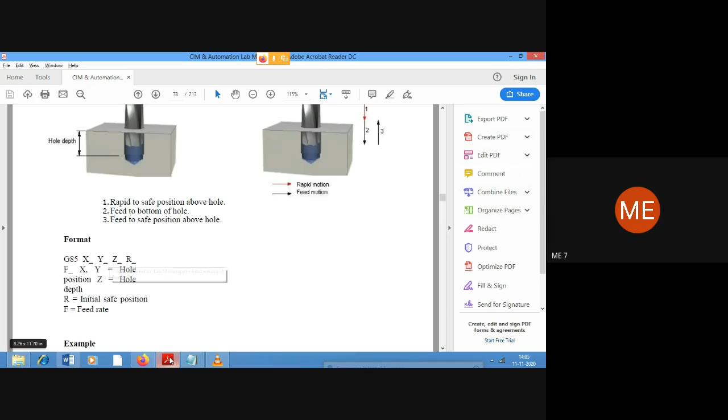Problem number 4. Write the manual part program for the part shown below using SeeNC Mill. Select the tool. For 5 holes to be drilled.

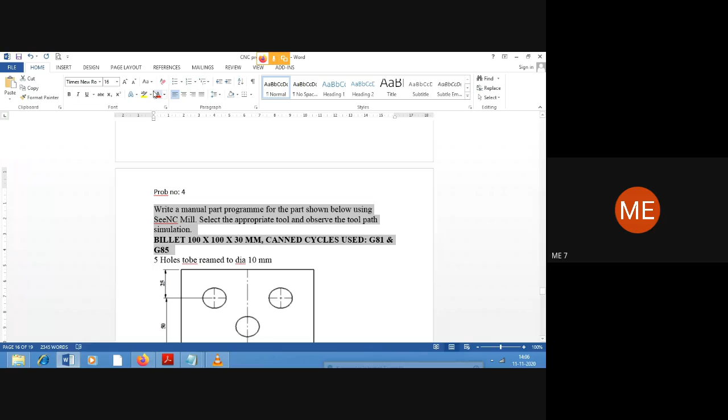So only write the manual part program for the part shown below using SeeNC Mill, right? Or will they only say write the manual part program for the part shown below? Okay, and these details will be given.

What, 5 holes to be drilled, to be reamed to diameter 10 mm. It has to be drilled, and if you remember the types of drilling operations, we have varieties in that. One of them is the counter bore, the other one is reaming. So here they are telling us that after drilling, it has to be reamed also, that is to provide smooth surfaces in the places where the hole is being drilled. So reaming has to be performed.

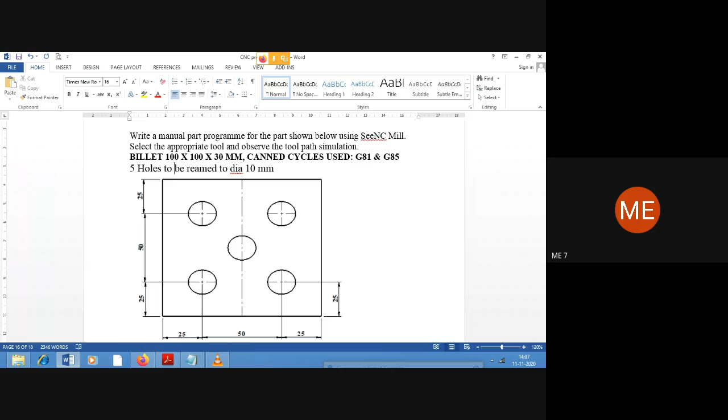Yeah, right. Now for this, we'll see what to do. So 5 holes have to be made. So first let us write the coordinates. The first thing is that anyway face milling has to be done. So the coordinate for the first hole over here is 25 comma 25.

Second hole, we can go for, just a second, right, so yes, they're going in here. So the second hole will be here. We'll take this x25 y75. Then the third one will be at a distance of 75 comma 75 over here. The fourth one will be at x75, y25, right?

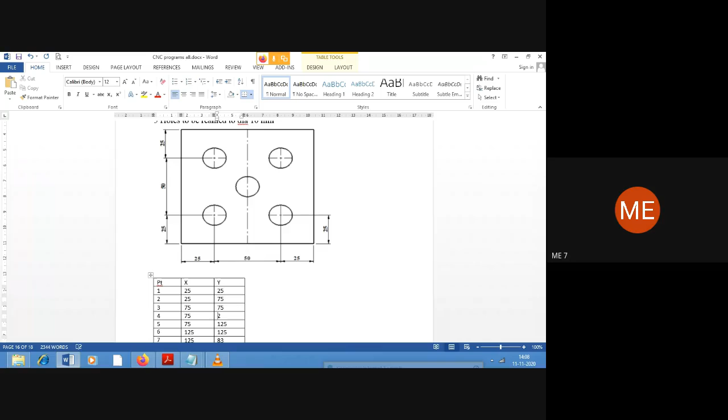Okay, so the remaining is not required, is not there. And there, we can assume the thickness of the plate if they are not given.

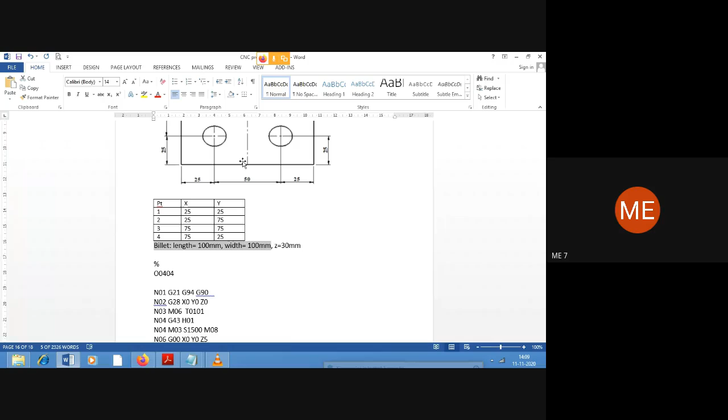Right. So now, after this, billet size, the overall size of the plate itself is 100 by 100. Okay, right, okay.

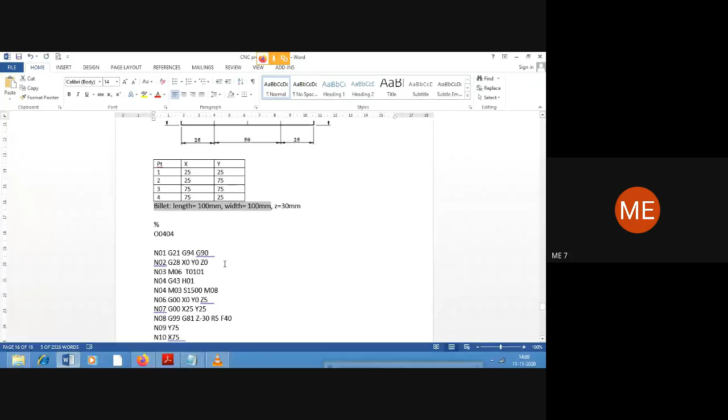Okay, so we'll start writing the program. Yeah, so for this, okay. In, second. Yeah.

Okay, so first start with the percentage symbol, then program number, first percentage, next line capital O, then followed by 4 digits, right? Then N01, G21, G94, G90. So, right, absolute coordinate system, G21 in SI units, right?

And so on, next line please, here it is as N01, 2, 3, 4 and so on. Please, when you write it, write it as N01. Next line should be N05, third line N10, sorry, N10, N15 and so on. Okay, right. So N02, okay, G28, X0, Y0, okay, and Z0.

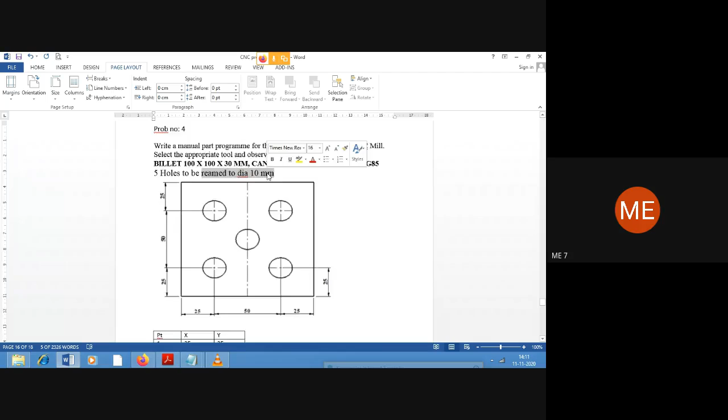Okay, right. So, but please, when you execute the program, or also when you write it in the record, first write the lines for face milling. Then the second tool will be for drilling, and the third tool in this case will be for reaming. Okay.

Right, so yes. Now after the spindle is started, we'll get it to do the drilling operation. So we'll get the tool to G00 X0... instead of this, we can directly get it over here at x25, y25, and z5. Yeah.

Right? All right, so now, see, in this case, in the previous class, if you remember, we did only drilling, which was for only 2 holes. But here you have 5. In some cases there'll be even 100 holes that has to be drilled. So every time we cannot ask the tool to, to say, for example, just a second.

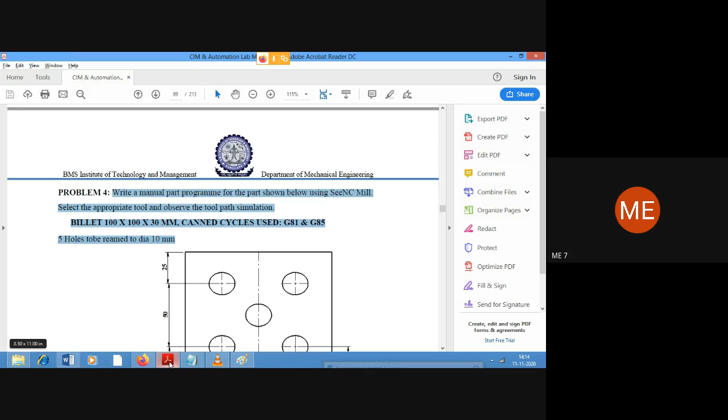We'll see the canned cycles for the drilling and reaming operations, for the drilling operation.

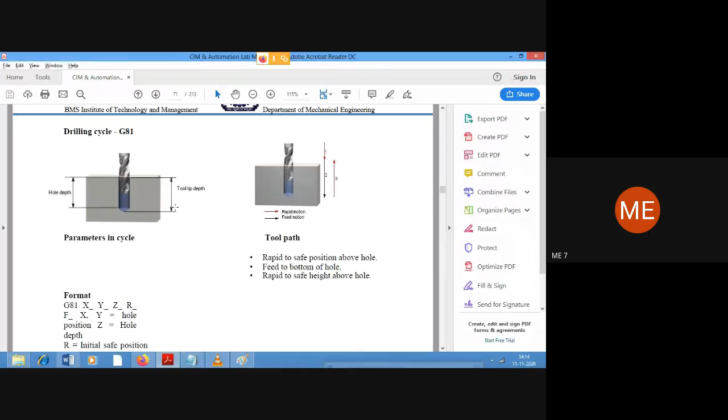Now for a smaller depth of cut and all those things, we can directly use the drilling cycle, which is denoted by G81. So if you remember the drilling operation, directly the drill bit tool will be going inside the workpiece, removing the material for a certain depth.

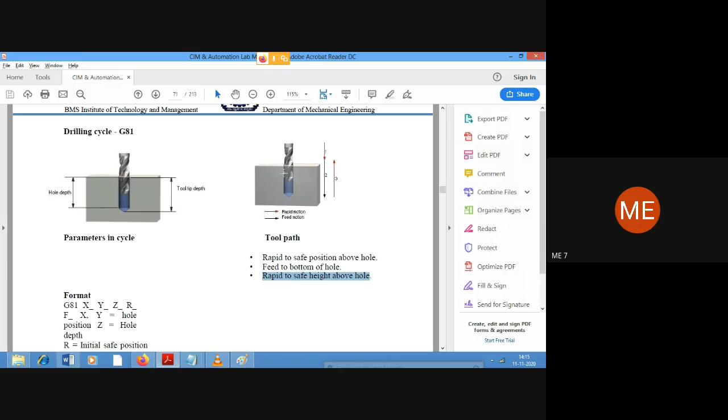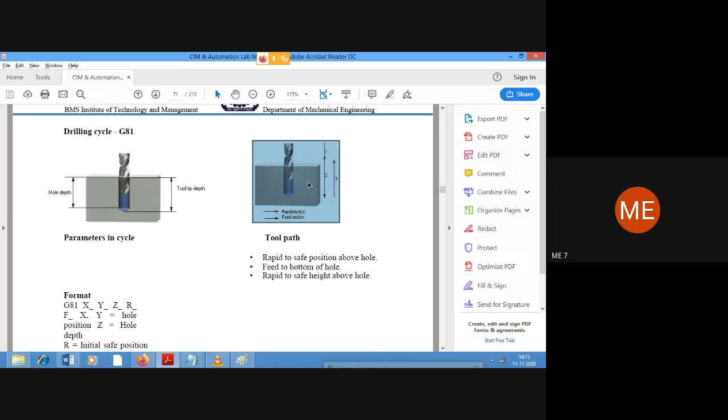All it needs is first, it should come to a safe position above the workpiece where it has to be drilled. Second, it should be fed to the bottom of the hole, that is, the drill bit has to move vertically downwards inside the workpiece. Then the drill bit has to come out to the rapid safe position above the workpiece surface, so that it can then move on to any other position, or go back to its home position. So G81 is the code for the drilling cycle.

We have to give the X value for that particular hole, Y value, Z value, and R value, say 5 mm above the workpiece surface, that is nothing but the Z value. Instead of giving Z5 every time, you give 5, or 10, or even 2 mm, though 2 mm is generally not preferred. That is the initial safe position.

And at what speed the drill bit has to be inserted into the workpiece, this is denoted by F. So this is the format and syntax for the G81 drilling cycle.

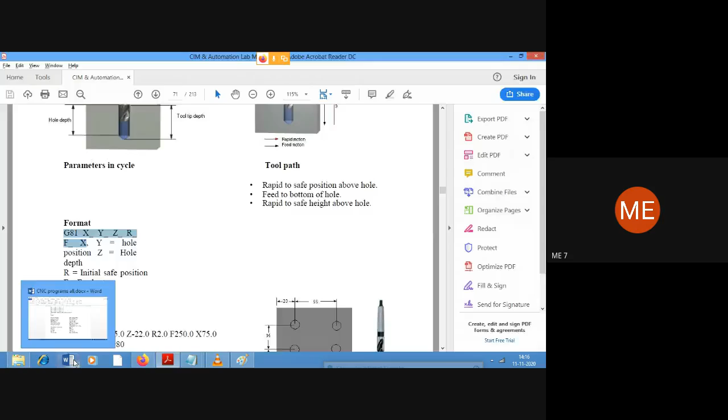So now we'll come back over here. G43 H01, spindle start. We have now brought the tool to X25, Y25, Z5, onto the first hole over here. Next is G99, that is, get the tool to the safe height.

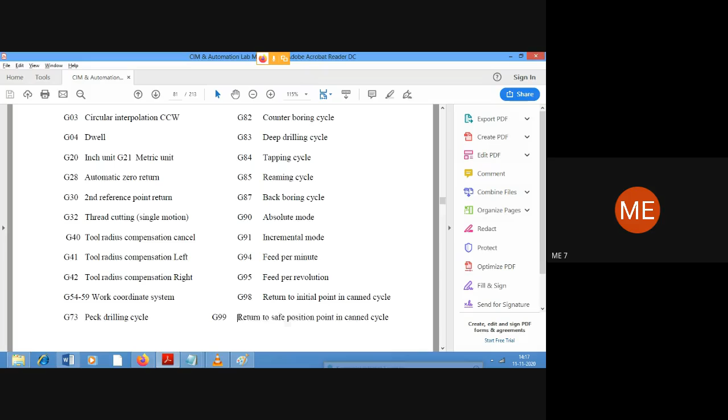Return to safe position point in canned cycle. Next, so now starts the G81 drilling cycle. We have already given the X value, Y value and Z value. We have to give only the Z value now.

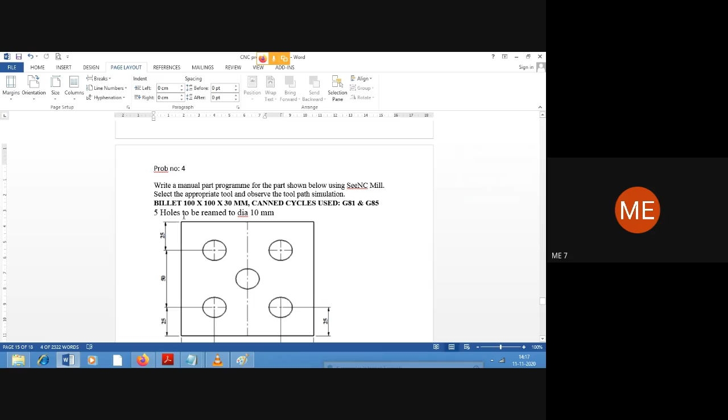So Z minus 30, because the question says it has to be drilled up to a certain depth, but they have not given the depth, so we can assume the depth, say up to 30 mm. And R5, that is return to safe position, return to 5 mm.

So if we have this as the X coordinate, Y direction, this the Z direction, we can ask the tool to come back to a Z point of 5. So the tool will be here, with a distance of 5 mm. And the tool should move at a speed of 40 mm per minute, sorry, not SI units, feed per minute.

So first hole is drilled. After that, it will come back to the value R, Z5. Then the tool has to move to its second hole. We only have to give the coordinate, no need to ask it to go inside so much depth, come back, and all those things. Just give the coordinates of the next hole, that's all.

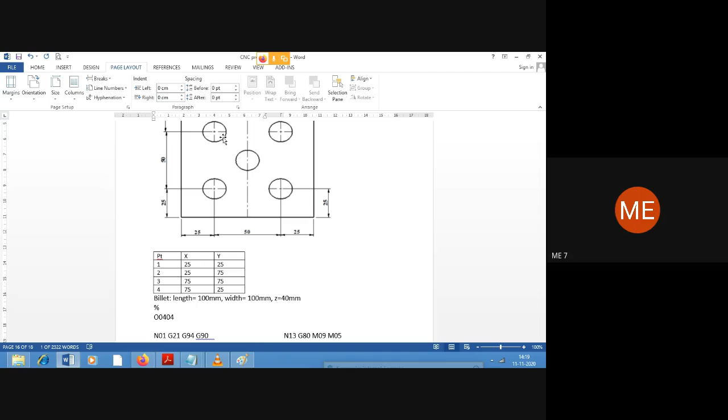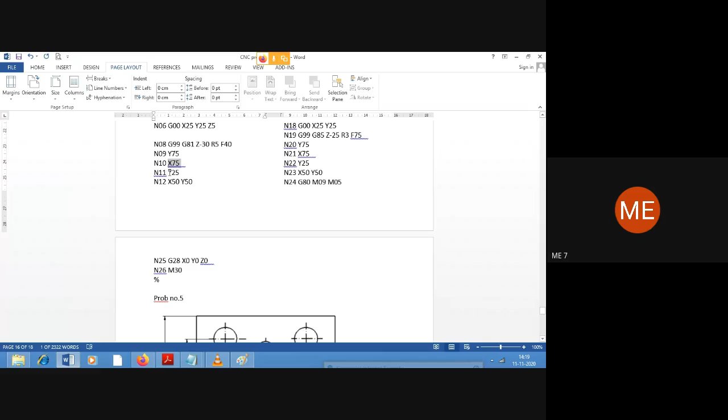So the next hole is at Y75, X25, since the X value is already 25, only Y is changing. Then in the next line, we'll ask the tool to go to the third position, X75, Y75. Then the fourth one, X75, Y25. And finally the fifth one, X50, Y50. Five holes are there, see?

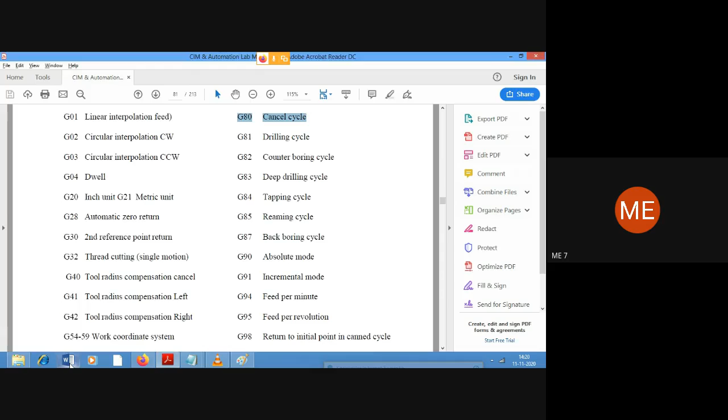Right, so after that, once it goes there: G80, M09, M05. G80 is the canned cycle cancel, so we are coming out of it. M05 is spindle stop, M09 is coolant off.

Then go back to home position, G28 X0 Y0 Z0. Then change the tool, M06, T0202. Next line G43 H02. Start the spindle M03 S750, coolant on.

So in tool number 2 here we are going to use a reaming tool, nothing but to give finishing operation for the drilled hole. Generally the speed will be less.

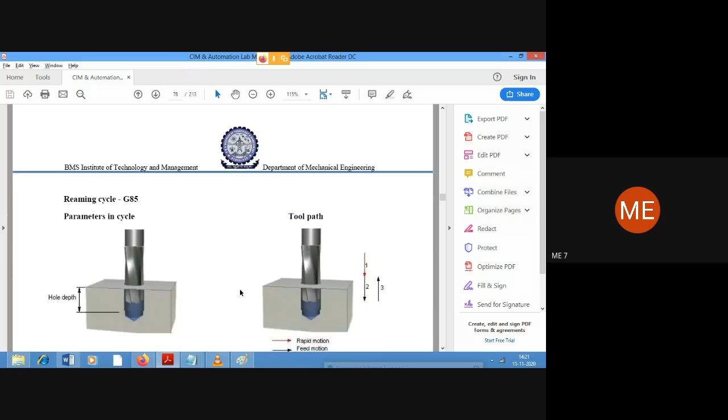Then get the tool to the position of the first hole, G00 X25 Z5. Then G99. G85 is the cycle for reaming. Reaming cycle, G85.

A reaming tool will look a little similar to a drill bit, but doesn't have so much depth of groove. Here's what happens: first the tool will be at a safer height, similar to the drilling cycle. Then the tool has to be inserted into the already drilled hole up to the bottom. Then the reaming tool has to return back to its safe position above the workpiece.

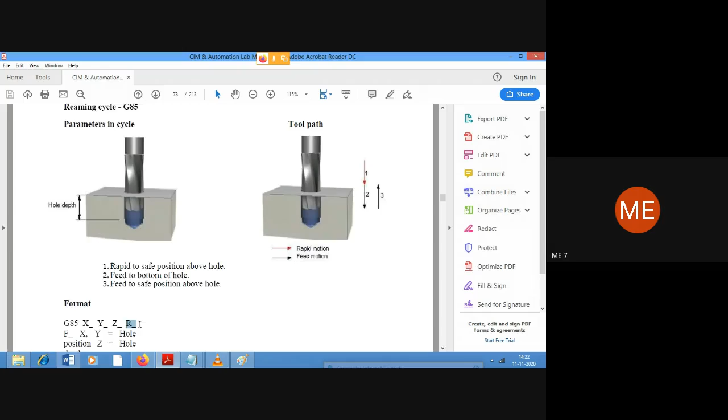So the syntax is G85, X value, Y value, Z value, and R value, along with F, the feed rate. So G85, Z minus 25.

Just a second, we'll put it over here. We have given 30 for drilling. Reaming also we can give up to 30. Then R3, or you can give return to safe position R5.

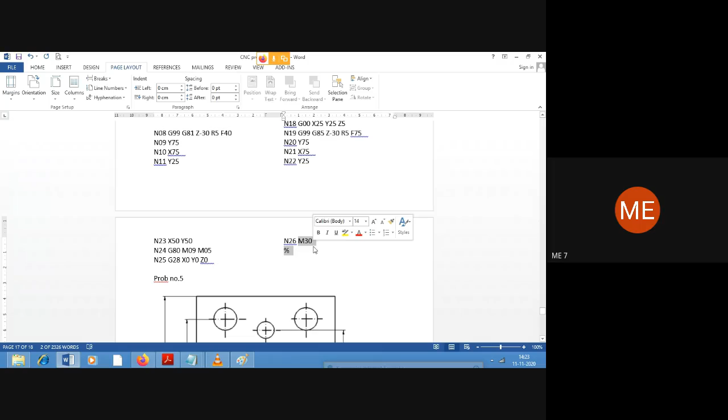Then F75. Similarly give the coordinates for the second, third, fourth and fifth one. So Y75, third one X75, fourth one Y25, fifth one X50 Y50. Then G80, cancel the cycle, spindle off, coolant off, G28, X Y Z zeros, end the program with M30 and then percentage symbol.

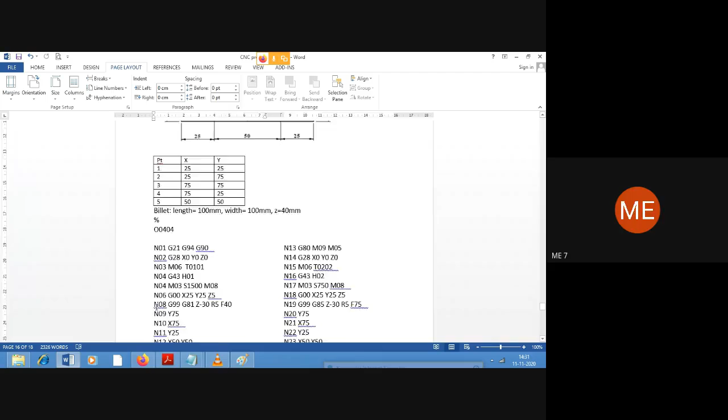Excuse me sir, over. Can you show the diagram sir? What, diagram sir? Diagram, yes sir.

Yes sir, it's over sir.

Okay, we'll see the simulation. Yes, first we'll go to CNC mill. So the program would have been typed in Notepad, so we'll open that.

Then go to define blank, 100 by 100, thickness 40. Select a CNC machine. Check for errors. Now go to the tools that have to be selected.

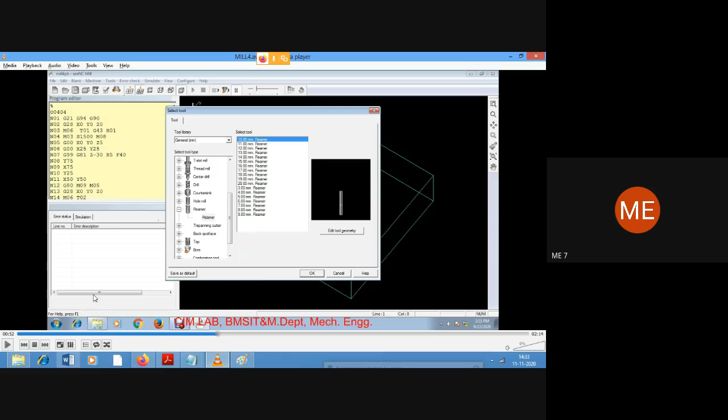Here you can see the reaming tool. Always ensure that the length of the flute is longer than the depth of the hole, and also the length of the holder face should also be longer than the depth of the hole.

Check for any errors. Now directly, this is the place where the first hole has to be drilled. Now the drill bit is 5 mm above the workpiece surface.

Actually here we are not showing the face milling, but since we've already taught you how to do face milling, it's the same lines that have to be repeated. They are only showing the other portions, but in the exam, in the record and internals, always do face milling first.

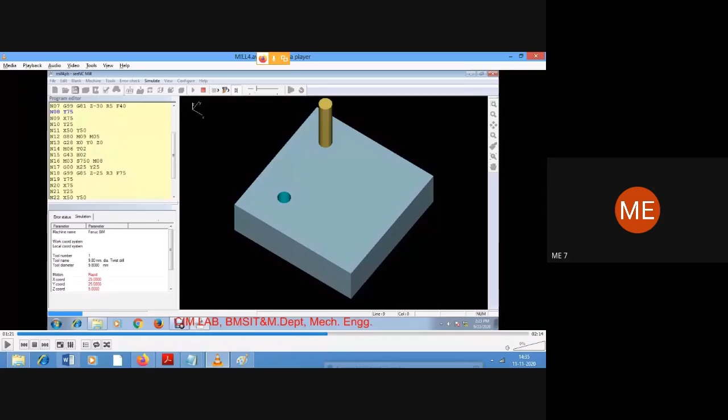Then the next thing is, no need to give G00, G01, nothing - just give only whichever coordinate is changing, the number for that. It will perform the operations accordingly in which the cycle is running.

The fifth hole goes back to its home position, change of tool. Yes, the reaming tool comes now.

For a safe distance, and now you see the drilled hole, the inner surfaces are colored green. After reaming, since it's a different operation, the color of the drilled hole will change as an indication - you can see the green color has now changed to pink, which indicates the reaming operation has been performed.

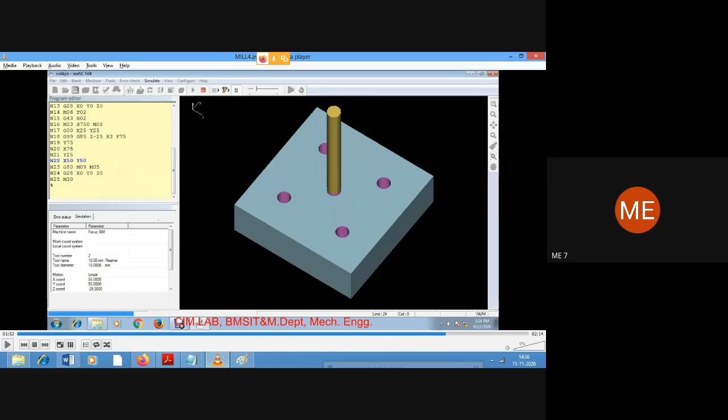Yes, right, so this is regarding the problem number 4 simulation.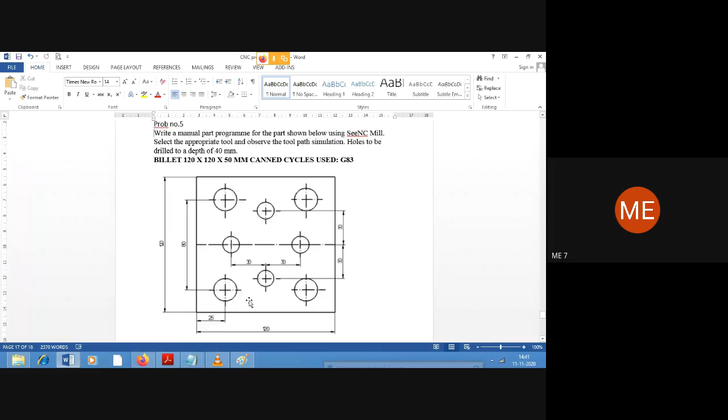Okay, so we'll write the coordinates for this. First let us write the coordinates for the bigger hole. So 25 comma 25. Second one will be 25 comma 75. Third one will be 75 comma 75. Fourth one will be 75 comma 25. So these first four holes are for the holes of bigger diameter.

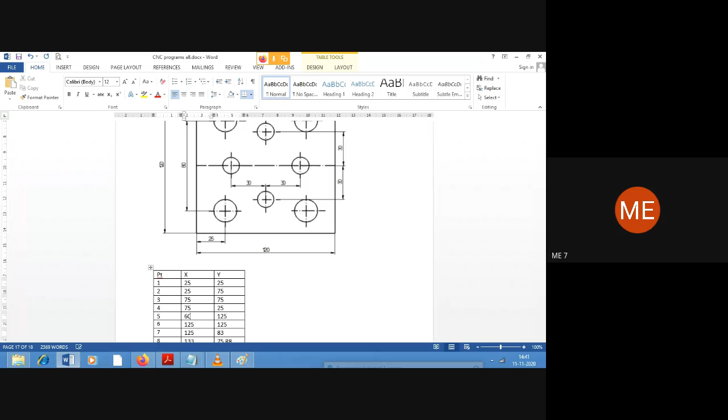Then the fifth one will start here, at a distance of totally 120, so the x value is going to be 60, and the height is going to be 60 again - it's half of the length and width of the plate. The total length and width is 120, so it's there exactly at the center.

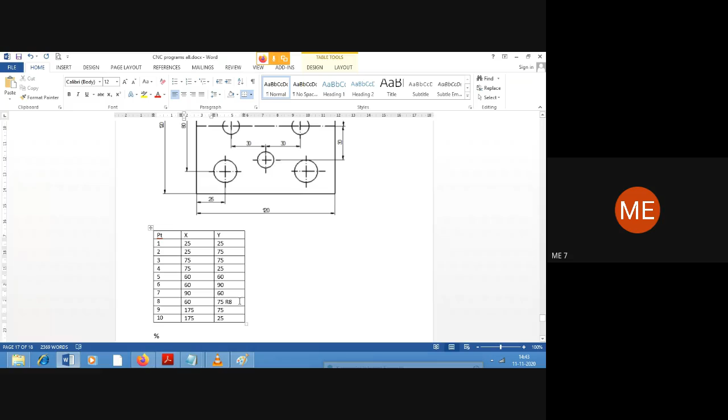Then for the next hole, this particular one will be at a distance of 60 plus 30, so here it will be 90 mm, and this distance will be 60 - x value will be 60, y value... the next hole will be at a distance of x will be 90, y value will be 60, and the last hole will be at a distance of x value 60, y value will be 30.

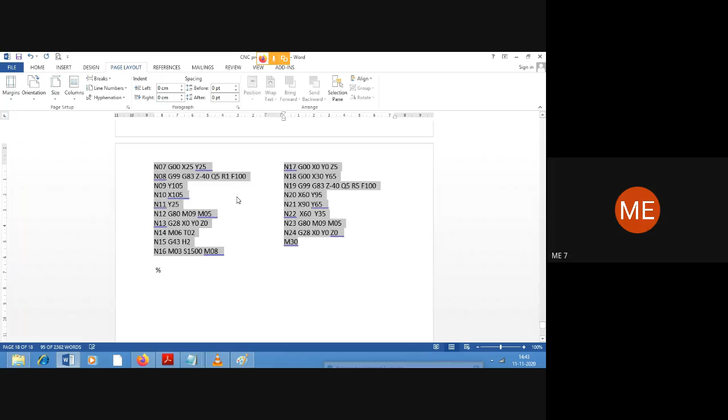Okay, so the program starts with a percentage symbol, then capital O followed by 4 digits. Billet size is going to be - yeah, that is already taken up - so billet will be 120 by 120 into 50 mm. Now whatever they asked, it's a 40 mm hole that has to be done. So hole depth has got a higher value, we'll see that.

Now N01, G21, G94, G90, then N02, G28, X0, Y0, Z0. The next line M06, T0101. Then next line G43, tool length compensation H01. Then start the spindle M03, S1500, start the coolant M08.

Then get the drilling tool to do the larger diameter, the required portion: G00, X25, Y25, Z5. Okay, then G99, G83. So G83 for the drilling cycle.

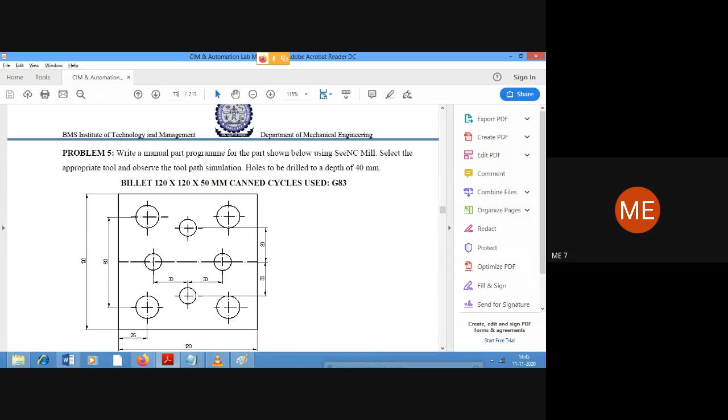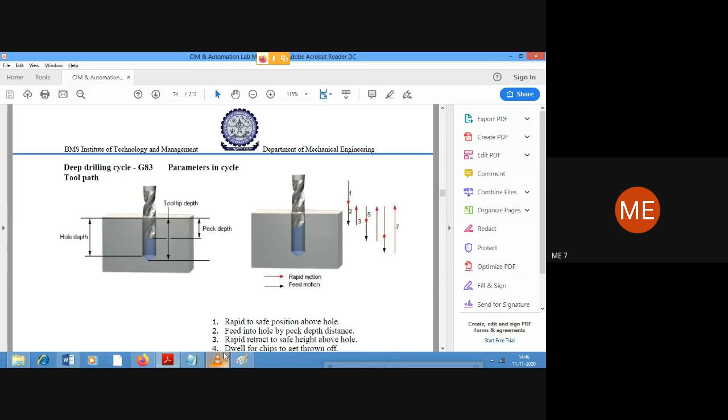Okay, where whenever the hole depth is larger, what do we do when we do a drilling hole? We first insert the drill bit into the workpiece for a certain depth, come back, and insert it back inside once again to perform some more depth of drilling, and then return back.

Okay, right. So there are two ways of doing this. What is that? I will tell you.

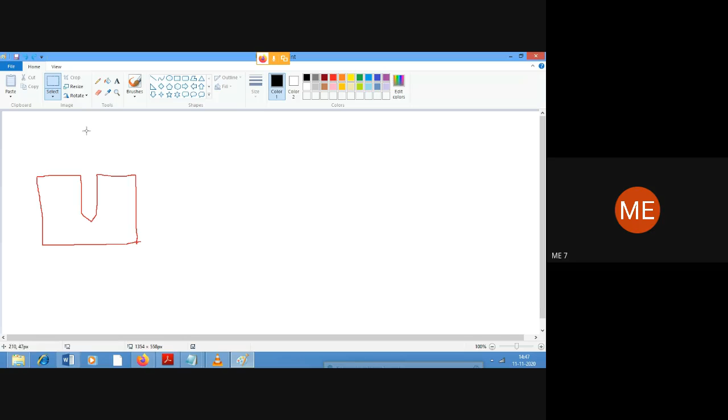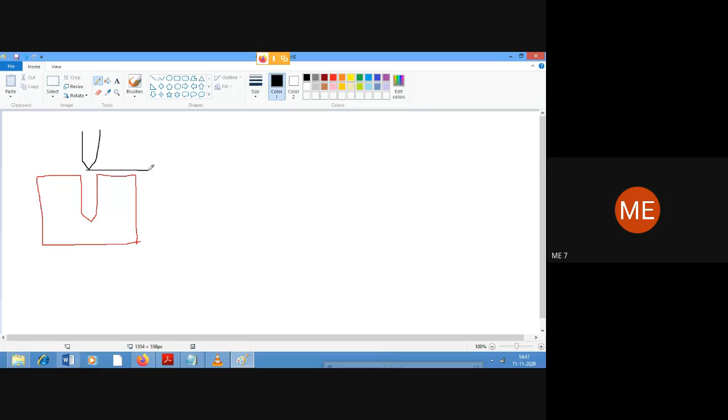So the first thing is that the drill bit will be at a safe position. Then from here it is going to be inserted for a particular depth - it's called the peck depth. Then it returns back to its safe position. Then in the next step, from here it is again going to go for some more depth for the next peck depth, that is 5 mm, then return back, then go up to the next 5 plus 5, 10 mm - so the next incremental distance is again 5 mm.

Then it will return back up to the safe position. Now when the hole depth is larger, unnecessarily this tool is moving over large distances at a smaller pace, so what they can do in such cases is: initially the tool will be here, peck depth distance 5 mm, next the tool will go back to its initial point over here.

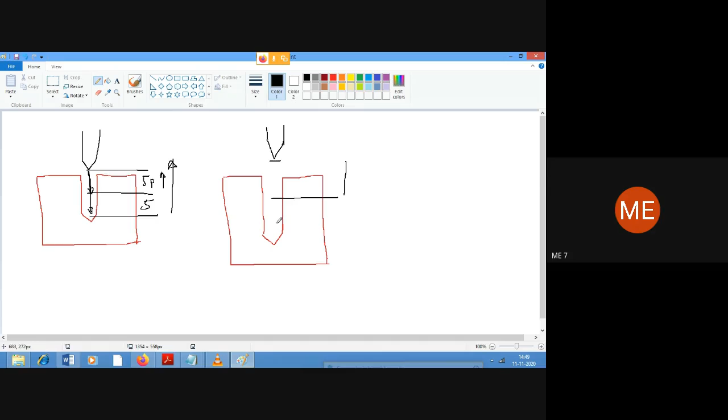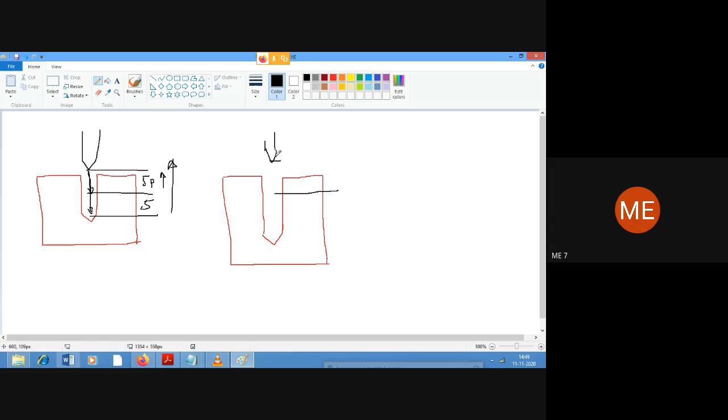Right, that was what was happening. When you give the G83 cycle, what happens is in the further on distance, once it reaches here, the next distance should be here, and then the next peck distance will be here. So every time, say for example the tool is over here, it has to reach till this point and then come down once again to do this particular depth of drilling in peck cycle, in peck depth.

Instead of moving for such a long distance, what we can do is after this step is over, that is after the tool is over here, we need not go back till here. We can give only a small reverse feed. So from here, the tool will go back only to this position, only a small back step, not until the origin point. And now the tool can go here, covering this distance. Anyway, there is no material in this particular place, so we'll be saving so much time for the movement of the tool for such a long distance.

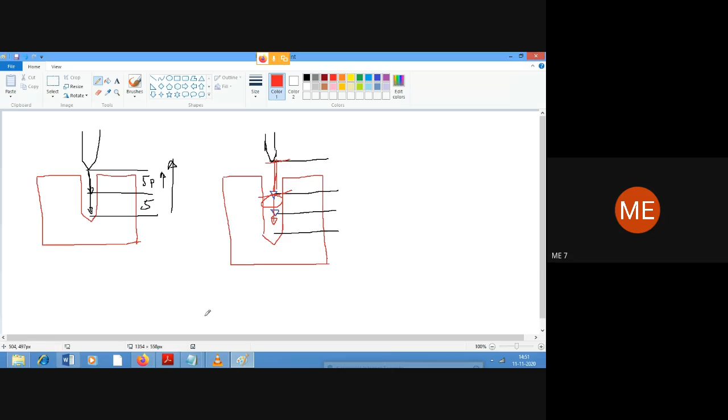So in the drilling operation there is no change, but it depends upon what code we are going to use. Even if you remember, when you do a drilling operation, say for example when you want to drill a hole in the wall for a larger depth, every time we don't take the drill bit outside the wall and then go inside. After a certain depth, we take it a little bit reverse, a very small distance. Still the drill bit will be inside the wall only, right? And further on, push it in front to make some more depth of cut. So that is what we are trying to do here. For that, the drilling code is G83.

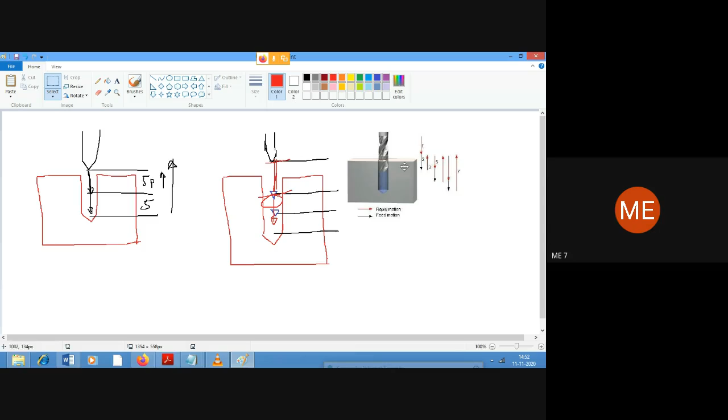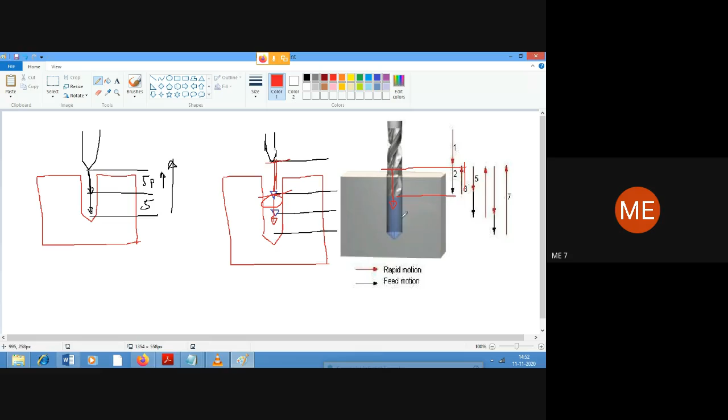So if you look at this diagram, first the peck distance, and now coming to the second diagram. Initially from the safe distance point, it will go up to here, then to the first peck distance, go back, reach this position. Then next, from here the drill bit will go down to the next peck distance, return back. But while returning back, it will return only for so much, not completely. So there are two ways of doing this: one is we can go up to the initial position, or only up to the required back step.

So the syntax is almost the same here. G83, X, Y, and Z coordinate values, R value for the initial safe position, and Q for depth of each peck. For how much depth should it go - 5mm, 3mm, and so on - and then return back and go. And finally the feed rate.

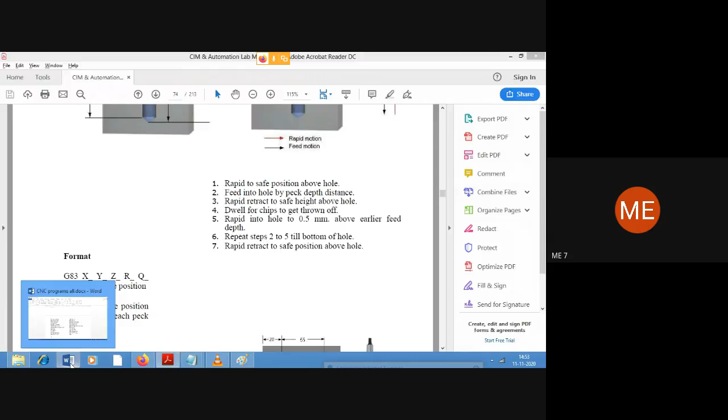So here I will go to the program. We were here in the program. So, G99, G83. Z up to -40. Peck depth Q 5mm. Return by 1mm, or we can even give up to 5mm. Initial safe position, right? Then feed rate 100mm per minute. Then the next value.

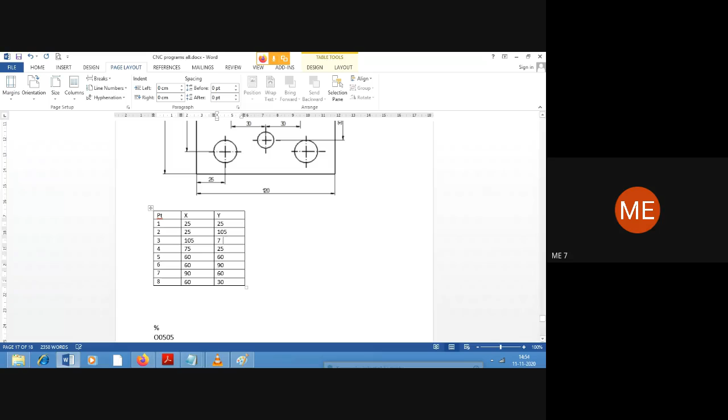It's here - no, sorry, I made a mistake. So this is 80. 80, isn't it? So this Y value should be 105, not 75. It is 105. Third one will be, if I'm correct, 105, 105. So second hole, X value 25, Y value 105. Third one, X value 105, Y value also 105. Fourth one, X value 105, Y value 25.

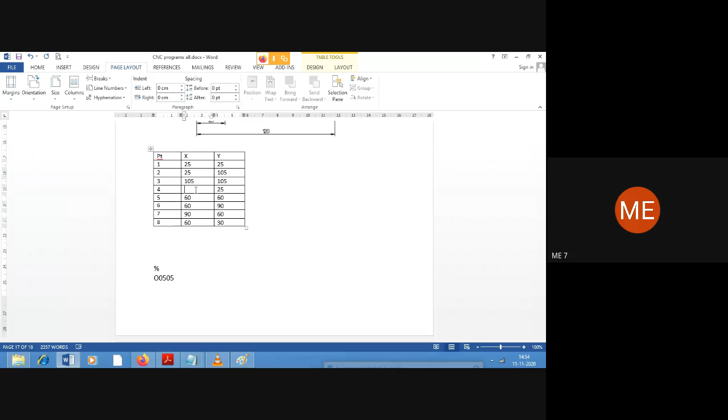Then after that, G80 to cancel the cycle, M09, M05. Then return to home position. Then go to tool change M06, T0202. Tool length compensation G43, H02. Then start the spindle M03, S1500, M08.

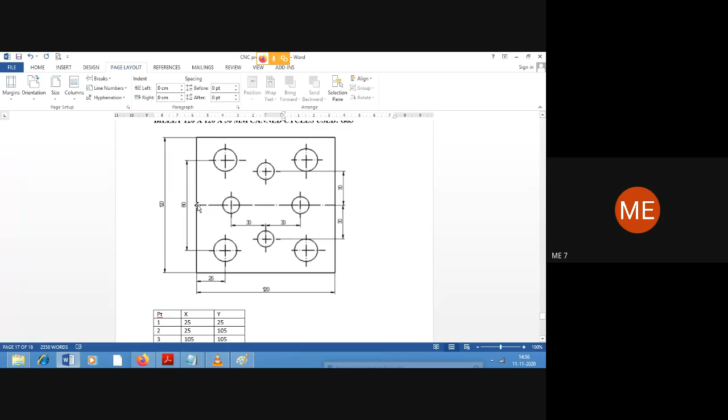Now next, G00. Here we can get the tool to hole number 5 directly, position. The value is, if I'm correct, X60. Y will be 65 - half of 120 should be 60. 30, 30, plus... 60 only, cannot be 65. It is 60. Okay, and Z5.

Next, start the drilling cycle once again. G99, G83, Z minus 40. Peck depth is going to be 5, R5, F100. Next one, X60, Y90. Then the next value, X90, Y60. And finally X60, Y30. Then cancel the cycle, G80, coolant off M09, spindle stop M05. Then return to home position, G28, X, Y, and Z all three coordinates to be 0. End of program, M30 and percentage symbol.

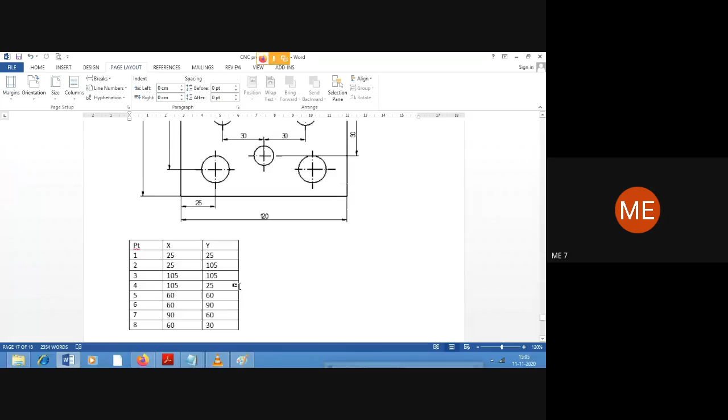Is it over? Excuse me, sir, can you go to the previous page? You want the diagram? Yes, the table, sir. Okay.

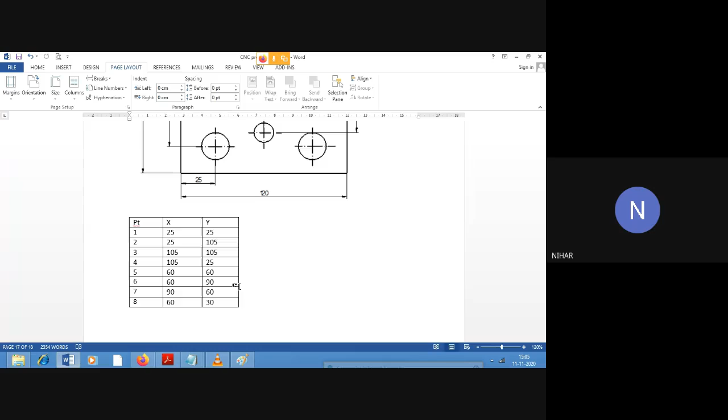Yes, the program is over. We'll see the simulation for this.

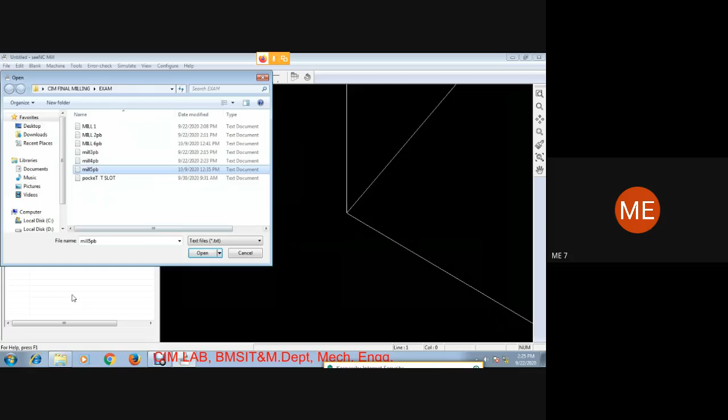We'll extract the program from the notepad. Give the X and Y values 120 by 120. Depth of hole is 40 mm. So let the blank thickness be at least another 10 mm extra.

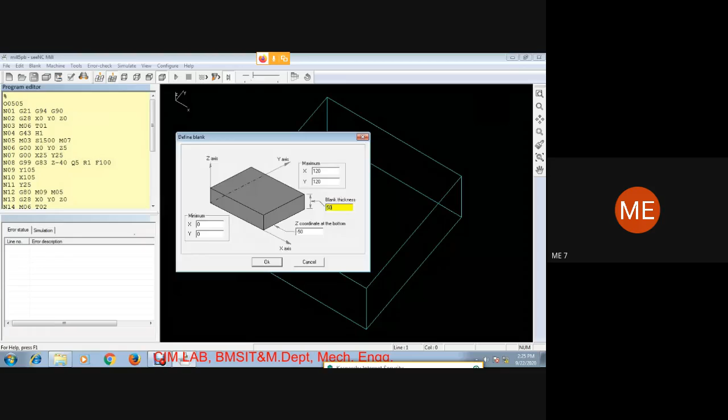Next, check the error. Select the CNC machine. Next should actually be tool selection. So the first tool - diameter wasn't mentioned.

So for the larger diameter, let's take diameter to be about 15 mm, and smaller diameter, let the diameter be 10 mm. Please make a note: larger diameter for T0101, tool dia is 15 mm, and for tool number 2, T02, diameter is 10 mm.

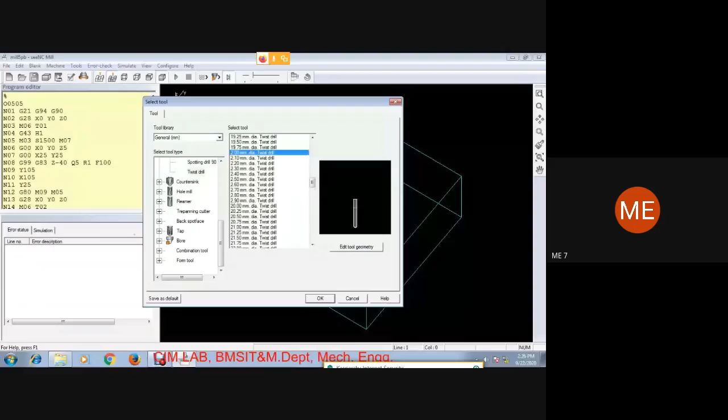And flute length is 54, tool length holder is 100 mm.

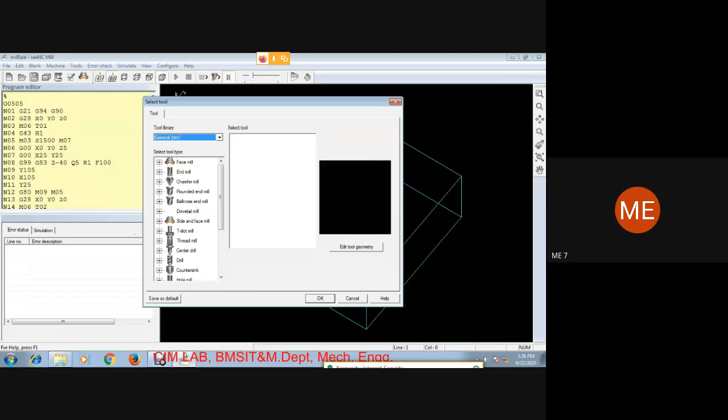Here also be careful. Initially the length of the holder face is only 48 mm, which is very small. Flute length is 43 mm. Already the depth of the hole should be 40 mm.

So please increase both of them. Make the length of holder face 100, and flute length 50 or 60 mm.

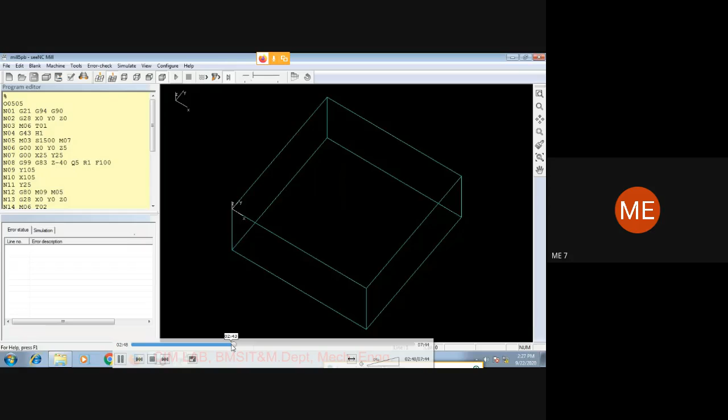So now you can check for this and then go for simulation. Get the tool over here at X25, Y25, Z5. Larger diameter has to be drilled first.

You can see here that the drilling tool is going only for 5 mm peck depth every time, coming out. Right, so here the third one.

This is the second tool, smaller diameter hole.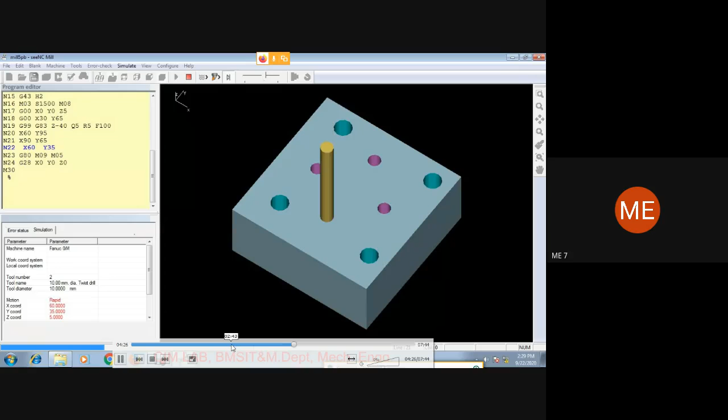Tool returns back to its home position, and that's the end of the program. You can see the same thing shown over here in line.

So here you can see clearly when we use G83, every time after each peck depth, the first depth comes back to its initial position above the workpiece surface. Second depth of cut, the tool will return back above the workpiece only, till the starting point. Third step, it goes back to the starting point. Fourth step, again to its starting point, which is above the work surface. So that is the difference between G81 and G83.

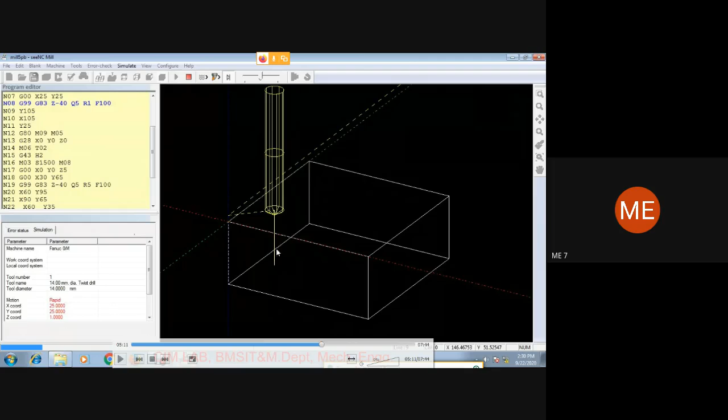So here also you can see that now it will return back. It doesn't come only for a smaller distance, it returns back up to 0 and comes down from its starting point. So that is when we need G83, for larger depth of hole, because the chips that is there inside has to be removed.

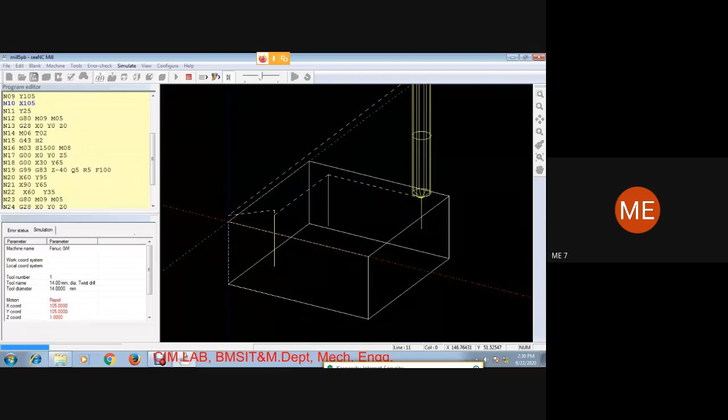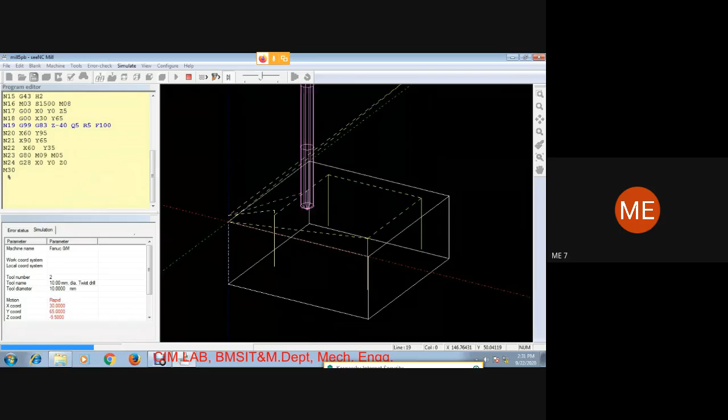For smaller depth of cut, it is okay, G81 can be used. For larger depth of cuts, G83 will be used. You can see the same thing happening for the smaller diameter tool also, because we have used G83 code.